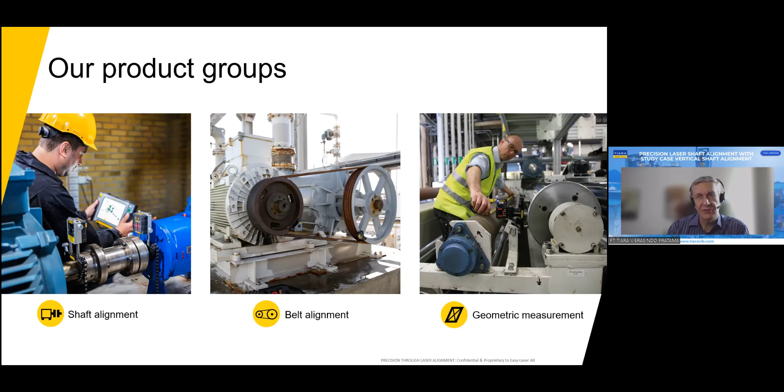So as Easy Laser company, we typically differentiate products into different groups. That is shaft alignment and everything included there, like for example soft foot measurement. Then we have belt alignment, some components, and geometrics. Geometric measurement could mean parallelism, flatness, levelness, bore as already mentioned - everything connected also to squareness and perpendicularity. There are many applications in the machine where we use laser instruments, and consequently the accuracy that comes along with it, to measure certain planes relative to each other in favor of putting machines in the right position where they are supposed to be. A little bit more on this later in the presentation.

We had an exhibition here in Singapore last week, the Asia Pacific Maritime APM exhibition, and many people came and engaged with us because we concentrate on solutions for the maritime market, but we are by far not limited to that.

When we think about industries, for us it doesn't actually matter because we find rotating equipment in all of those industries. You might identify with wind power, energy production plants, or sawmills, for example, where we have a solution to measure the blades of the sawmill compared to the roller that pulls the logs into the machine. Then very typical is processing industry, shipyards as just mentioned, or any kind of manufacturing industry.

So to sum up, wherever you have rotating equipment in an industry where production or operation depends on the availability of these assets, we are typically involved with solutions to provide the technician the means to align the machine.

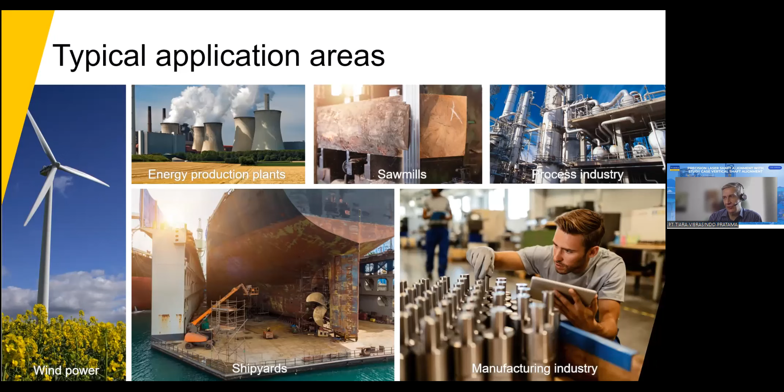But coming a little bit closer to today's topic, I'd like to start with what reliability actually is. I already mentioned the word reliability, and today many people use it very casually, but did you ever think about what reliability really means? Think about us in maintenance, technicians, engineers, and so forth.

Reliability was introduced into the thinking already more than 40 years ago, and it started with reactive maintenance. That's where you have a problem in a machine and you react as a consequence to fix it. You always react to an event on the machine to repair it, to fix it, to replace it. That's old-fashioned and not applicable today anymore.

Many years ago, preventive maintenance came into play. We take statistics to predict how long the machine is operating, or when it could fail, so that the machine would be repaired before it actually fails, to avoid an unplanned shutdown. But it has been learned over the years that this doesn't work out with statistics, for one reason, and I'll show you that in one of the coming slides.

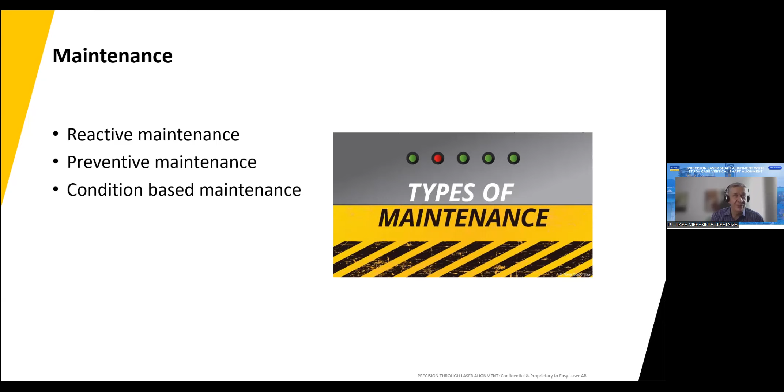People then moved on more into condition-based maintenance. That means making decisions about certain maintenance actions or activity on the machine based on certain parameters of the machine, typically a symptom of noise, temperature, or vibration that says the machine is maybe not well equipped at the moment, and consequently I'd like to bring the machine into better condition. It's kind of a health concept: when I am unwell, I go to a doctor, check it out, and take a countermeasure, medicine, or get a certain treatment. Condition-based maintenance is very similar to that.

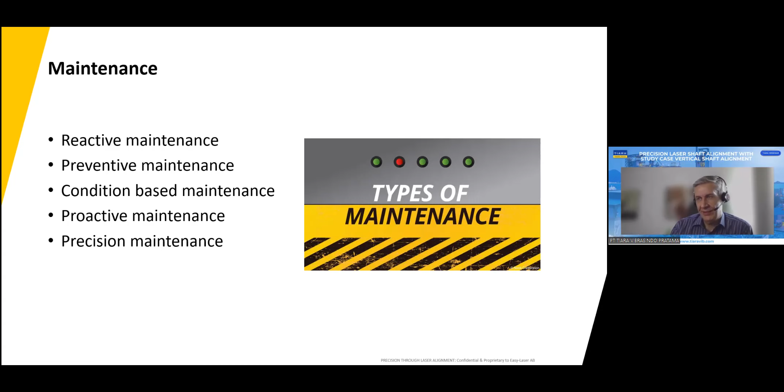Then people went even a step further and said, why wait for a problem to occur and only then react? Why not act proactively? Basically, do everything possible to avoid a potential problem in the machine that would come in the future. Why shouldn't I invest my efforts into an asset to eliminate potential problems for the future? That's called proactive maintenance.

Consequently, in this proactive maintenance, a lot of references are used that describe tolerances for certain conditions, and so we have precision maintenance: doing the job more precisely, setting up the machine within certain tolerances as required by standards like ISO or ANSI, the American standard.

The last stage was to really focus the maintenance strategy on reliability-centered maintenance. That means doing everything possible in combination: applying condition-based maintenance, but also acting proactively and being precise at the machine. Reliability-centered maintenance is the latest approach, which typically has the best outcome overall in saving money. Saving money means reducing downtime, avoiding repairs, and extending the lifetime of an asset so you get the most out of this investment.

But what does reliability really mean? I've summed that up in a very simple sentence: in the machine world, reliability simply means without failure, and preventing failures from occurring — then a machine is reliable. There's actually a longer definition that says a reliable machine would operate without any interruption and without any failure for a certain amount of time. To assure that, certain requirements need to be met: perfect installation and operation, which comes back to being perfectly aligned, perfectly balanced, lubricated, etc. This is something that doesn't start with the asset itself — reliability thinking starts with the people.

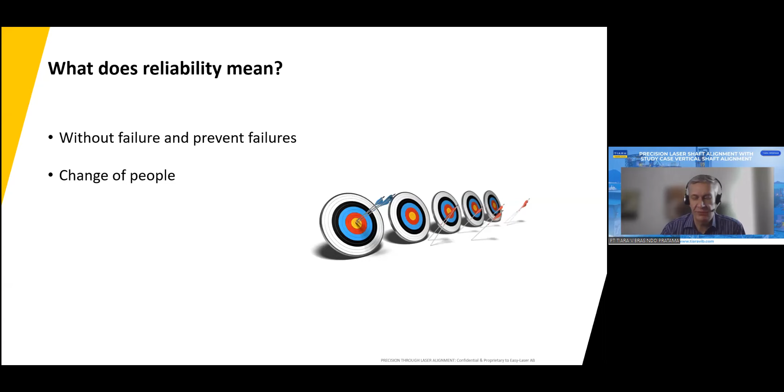So people need to change. People need to adapt to those kinds of requirements, to have a certain strategy to plan actions and fulfill them. Therefore, education is important, and this education helps change the mindset of people to concentrate on preventing the machine from failing instead of repairing it. Maintenance is always needed—you have commissioning, handing over into production, and then maintaining the machine—but we are no longer aiming to repair a machine after it fails. We concentrate on the machine not failing at all, applying maintenance activities before that event occurs. That is a change of people, especially mindset and education.

But it also includes managing resources. Resources are rare today. Reduction of manpower is quite common in industries. Everything becomes automated, but a lot of activities in the maintenance world rely heavily on engineers like you. So we really need to plan to concentrate all the resources given on focusing on the reliability of the machines or assets.

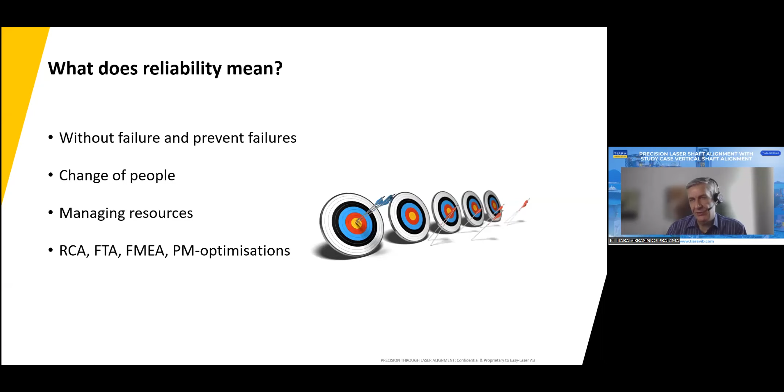And then we have root cause analysis, RCA included. We have the FTA, fault tree analysis—a kind of technology, a statistic applied to calculate a certain prediction of individual assets: when it would be failing, how it is failing, how it can be recognized to have an issue. We have failure mode effects analysis, FMEA, and all of that comes together in certain preventive maintenance optimizations. So that's all bullet words and concentrations in the maintenance world today, typically applied to any kind of plant and operation where you have rotating equipment.

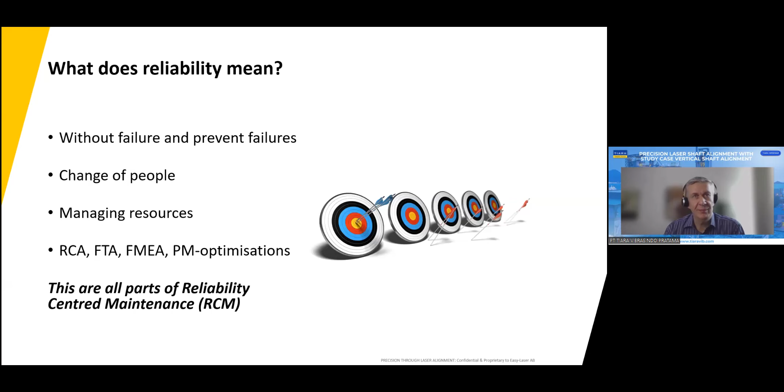All of these are typically parts of reliability-centered maintenance. And that's why we're also including alignment strategies—precision alignment, to be more correct—to help extend the lifetime of the machine and reduce failures.

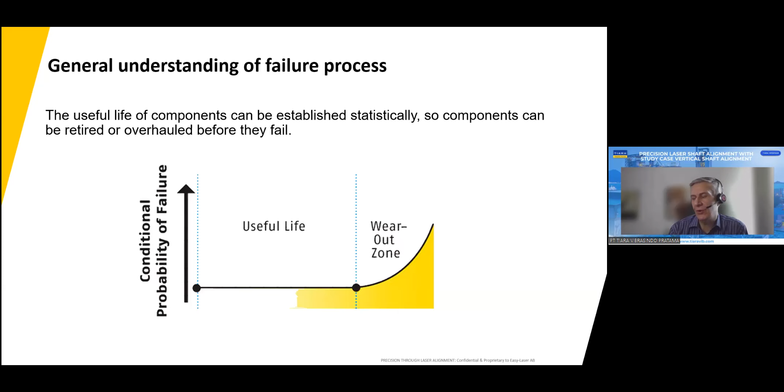But the whole prediction here is actually a little bit wrong, because if you look into some research—this happened in the mid-60s, many years ago—there were studies by two persons, Nowlan and Heap. They are well known in the condition-based monitoring world, and they studied machine failure patterns. They figured out, and it has been confirmed multiple times since the 60s and is still true today, that only 11% of operating machines in the world in our industries fail because of age.

So the previous slide gives us a certain expectation of lifetime and when a machine wears out. But only 11% of machines act in exactly that way. Way more, 89%, create failures during the lifetime. That's an initial break-in period that is potentially random, or the worst and most common scenario, seen at the bottom right, is infant mortality. That means 68% of assets today have a high likelihood to fail at the beginning of their lifetime, not at the end. And the reason is quite simple, but we all ask why it could happen.

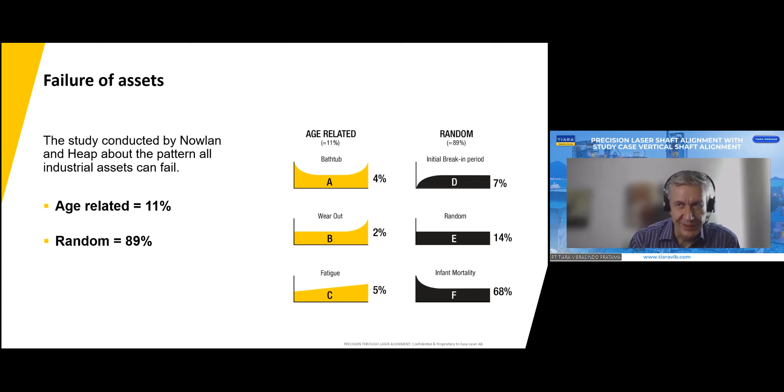It's us, humans, because we are not perfect. A completely different study has revealed that the reason machines fail is also not aging—that's only 4%, something wearing out over time. Basic wear and tear represents 12%. The reason machines fail, mostly contributed—84%—is careless work habits. This means the machine has not been produced correctly by the manufacturer, outside of certain tolerances, or has not been transported correctly from the manufacturer to its end destination.

It potentially has been loaded on a truck, goes over a rough road, gets shocks, bearings are damaged, or on a train. Then it's lifted on site, maybe wrongly by a crane. I have seen in the field somebody put the sling around the shaft of a heavy machine and lift the machine to put it in place. So the whole weight from the machine block is hanging on the bearings connected to the shaft where the crane is mounted. At that point the machine is already very likely pre-damaged purely because of transportation or putting it on site.

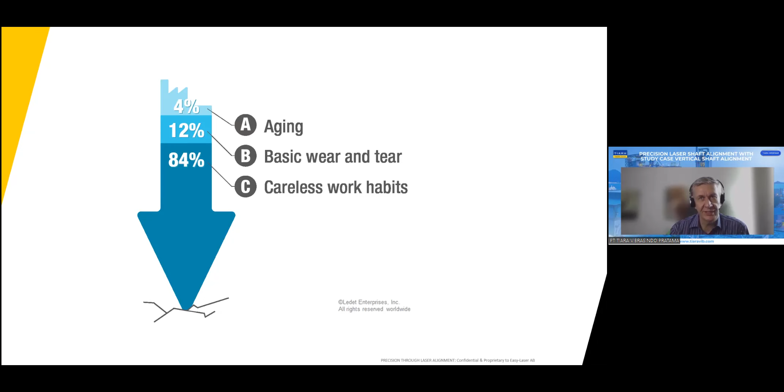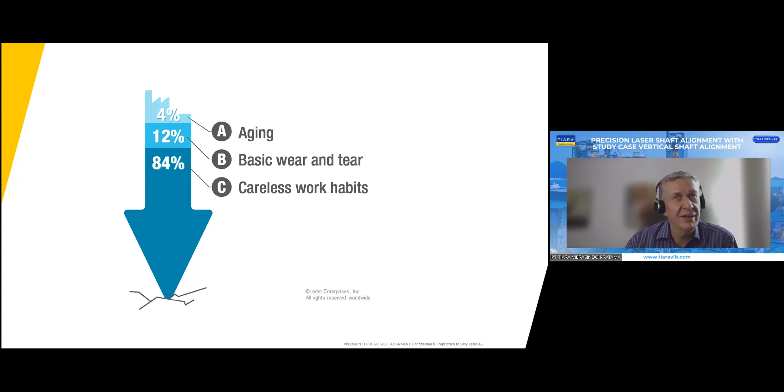That is humans that make mistakes. They treat the machines in the wrong way, or commission the machine, set it up wrong on its place. This includes the foundation of the machine, the base where the machine is standing on not being as required, not flat, not leveled. A machine can have a soft foot because something has bent. Consequently, when the machine is handed over to operation, it starts already with a pre-damage. So all of these reasons are really engineers and technicians contributing to reducing the lifetime as a consequence, and therefore we have random occurring failures.

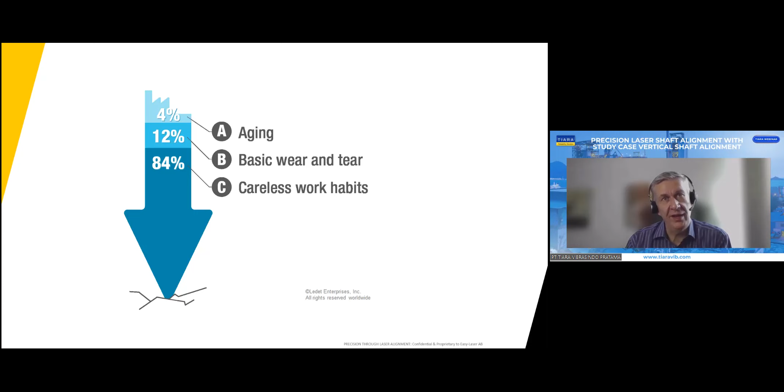With precision laser alignment, you have some tools—there are many others, not only laser alignment—that help you put the machine in place in the right way, to certain required tolerances, everything with the aim to have a reliable operation in the future.

And that's where we have this kind of potential failure curve. Also in the vibration world, this information is quite common to be shown. Vibration world means reliability, thinking about maintenance strategies, that a machine that has a problem, like a human being, creates symptoms. So if I'm having a headache, feeling unwell, my problem is not the headache. The headache is a symptom. It's caused by something else.

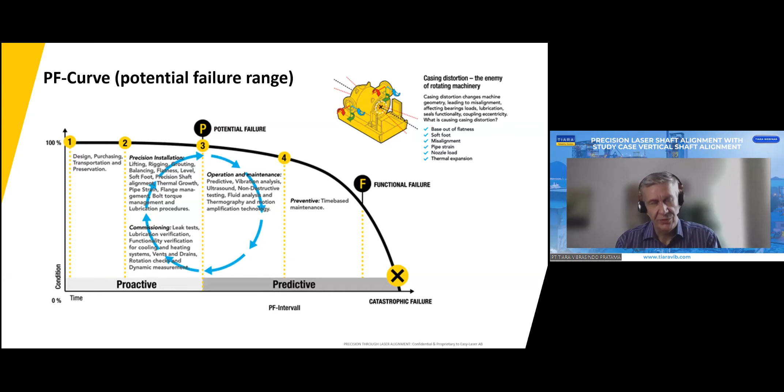Consequently, we have electronics and all kinds of data analyzers and technologies today to assess machine conditions and recognize symptoms, but I still have to do a root cause analysis to figure out what actually causes this symptom. Because if we never fix the initial problem the machine has today, we will find ourselves in one or two years again at the same point.

You can see the symptoms develop between the P and the F, inside that range marked starting at point number 3, which is the potential failure, towards the functional failure when really something is breaking down. That is where electronics and instruments today are able to catch the symptoms—vibration, ultrasound, or thermography—in that range you basically measure a symptom.

As you can see, between point number 2 and 3 is where we recommend end users and technicians apply precision shaft alignment, because shaft alignment helps extend the lifetime and avoid catastrophic failure. So instead of waiting for a problem to occur, why not be proactive and do everything possible at the beginning of the machine's lifetime to have a machine that has no stress, no pressure points on the bearing, no misalignment.

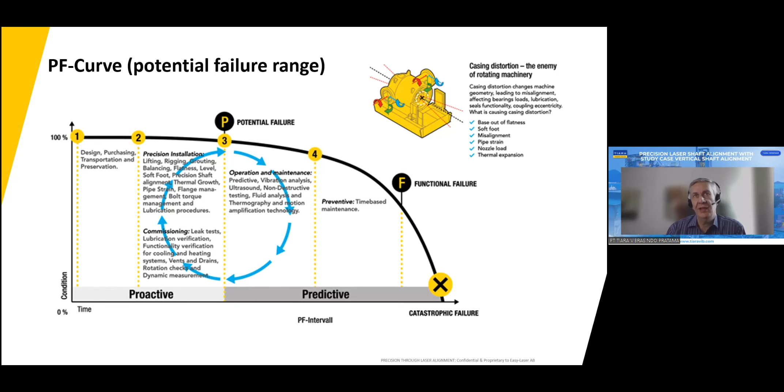This includes rigging of the machine, grouting, balancing, measuring, and verifying the flatness of the base, the level, checking and eliminating soft foot, and then it comes to the precision shaft alignment. So there are so many things that can be and should be checked today, and we only need the technology and the mindset, the education to do that. It's proven that precision laser shaft alignment contributes to the reliable condition of the machine and extends lifetime.

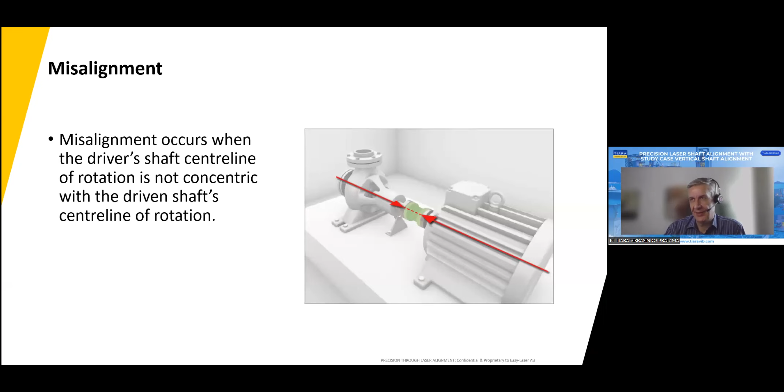What is machine alignment? We talk quite often about alignment of machines, and I'm sure you have an idea. The basic idea is shaft alignment, but not only alignment. When we think about misalignment, we talk about the shafts. Misalignment occurs when the driven shaft center line of a rotating asset is not concentric with the driver's center line. We are not aligning the coupling, we are aligning the machines physically to each other so that the rotating shafts are in center.

We will later learn that we mount our laser measurement components on the shaft to assess exactly this information. The correction of the machine, then, is done on the feet, where we can really countermeasure by doing some shimming.

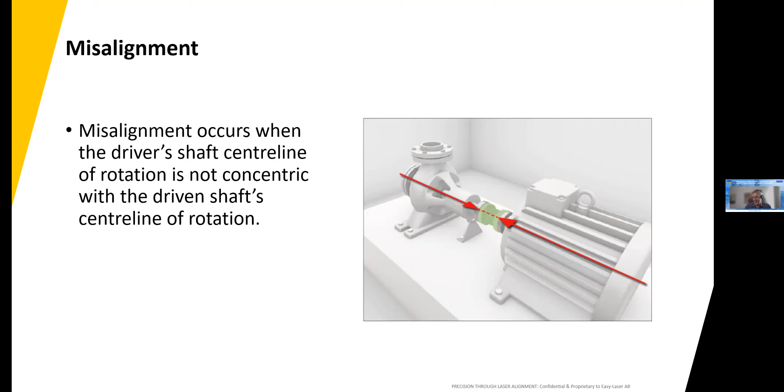If you think what kind of misalignment could exist, that is parallel misalignment and angular misalignment, and there are various ways this kind of misalignment is caused.

An inaccurate assembly of components could be the key for the coupling, the coupling itself, the bearing, or the machine on its base. There are a lot of parts responsible for inaccurate assembly of components. Even a connecting pipe to a pump can be inaccurately assembled and cause misalignment.

The relative position of components shifting after assembly, so something has changed compared to the initial setup. We can have a distortion by dynamic forces. Dynamic could mean in a pipeline where you have a different medium with a different temperature pumping inside and outside of the equipment. So certain things, because of temperature, start to extend and push the machine into a wrong position. Consequently, it becomes misaligned.

This is often summed up as thermal growth, but it's better to say dynamic influences, because the distortion can come from the growth through temperature of the machine itself, but also by the pipe, by the medium inside of the pipe, or other components.

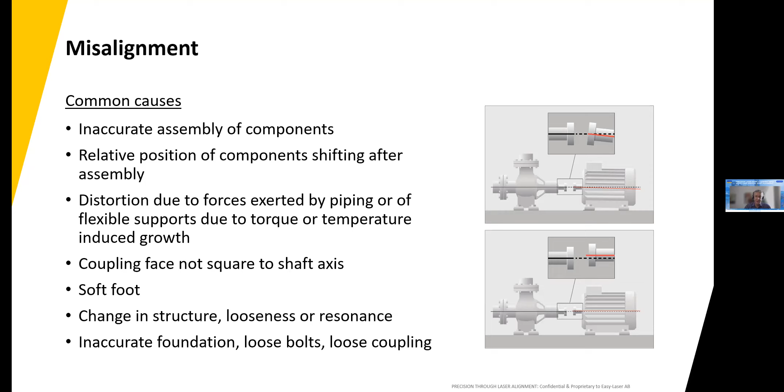So there are many reasons why a machine could be misaligned. Inaccurate foundation, loose bolts, loose couplings are just a few more.

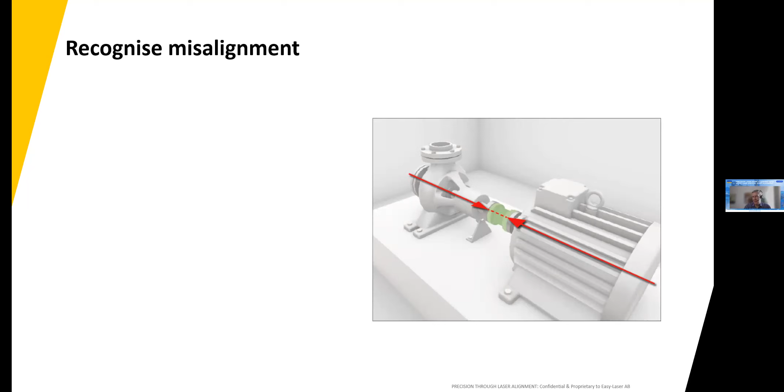How do we recognize misalignment? So also here, a little bit about vibration, but very simple: earlier seal and bearing failure.

When the bearing, which by design is actually created to operate infinitely, so the bearing by itself does not become faulty if it's lubricated correctly, a bearing would last forever. But throughout load conditions, start, stop, and misalignment, the bearing starts to fail. So earlier seal and bearing failure is a symptom that the machine is potentially not correctly aligned.

Excessive heat is also related to stress inside the bearing throughout the rotating shaft. If something is misaligned, then typically we have a temperature that is increasing. The machine operates with less performance, meaning it could take more energy to drive a certain driver or just have a higher play. These are typical symptoms for misalignment. Another symptom is vibration and noise.

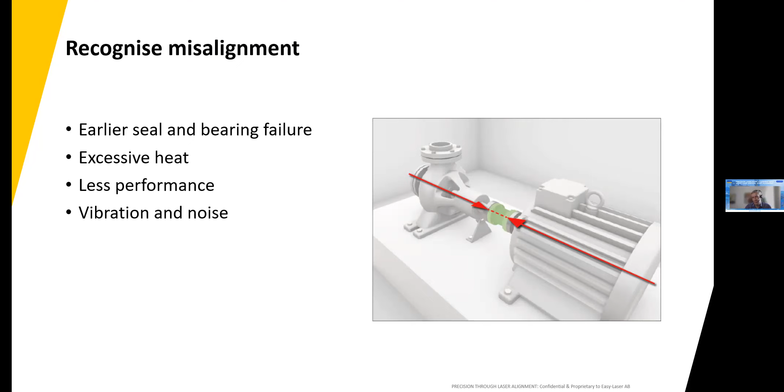Already explained that a vibration is a symptom of an origin problem, a root cause. Higher power consumption, typically - if I have strain or pressure in my bearings because of misalignment, I require more energy to drive those shafts to the nominal speed I want. Consequently, if there's resistance inside, I require more power. On the other hand, if my machine is perfectly aligned, I can save power consumption - I save money, up to 10% in many cases.

So alignment check would be the ultimate way of recognizing misalignment. But of course, I need to access the machine when it's not operating. It's very quickly done to put the brackets and measurement technology on a non-operating shaft and just measure and check the condition. But it is required that the machine is not operating. The alignment check is the best one, but there are many others inside the operation of the machine that I can take to recognize misalignment.

What kind of parameters should I compare my condition of the alignment to? We have tolerances. Here we see a table of the ANSI, American National Standards Institute, which today is worldwide used to describe the minimum accuracy level that the shafts need to be aligned to. We have here typically an association from a certain tolerance to the speed of the machine, and I have underlined two in red: one's 1,000 to 2,000 and second 2,000 to 3,000 RPM. An excellent alignment, so no harm to the machine, has an allowable offset of only 0.03 millimeter.

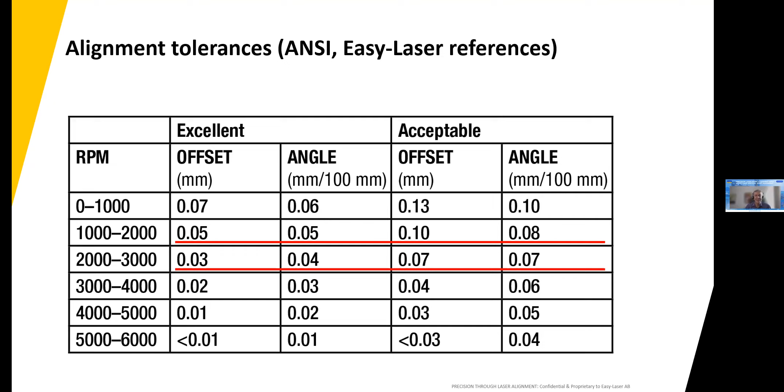So 3 hundredths of a millimeter is my offset. The angle misalignment is 0.04 millimeter. Acceptable is about double this amount - that's in between good and bad. The bad one I did not even mention, so everything that is neither excellent nor acceptable is not permissible. That means the machine is misaligned and harms components in the machine when it is operating. So those references are inbuilt - you can activate them on a laser alignment system and just compare the condition of the machine to those references. Are you actually inside those tolerances?

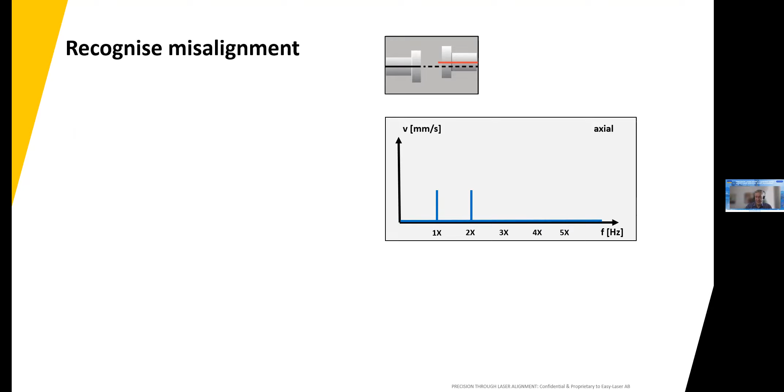Another way, coming back very quickly to vibration, to recognize misalignment - many businesses today use some data analyzer vibration equipment. They are also using an FFT, and quite often you should be able to recognize, based on the pattern given - not necessarily the absolute vibration value - that there's a first order and second order appearing. 1x and 2x are the orders of the running speed of the machine. So a machine that runs at 1500 RPM, first order is equivalent to 25 Hertz. 2x is the double, 3x the triple - very simple, but it refers to the speed of the machine. If you have some energy, some peaks in an FFT in the vibration world, we can assume there's a misalignment.

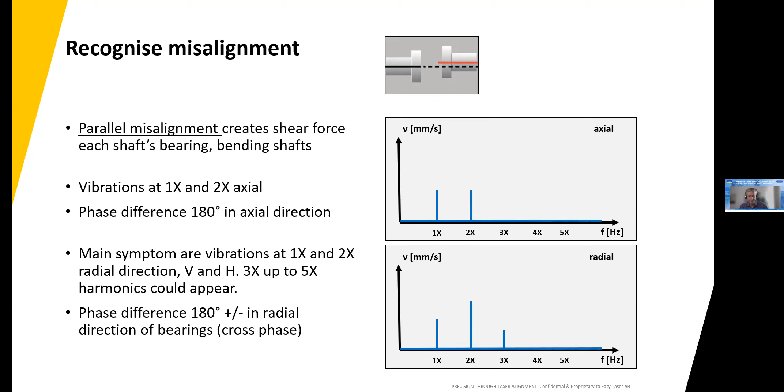So misalignment - we have here a differentiation between parallel and angular misalignment. Now, this material which we are showing you in this presentation, PT Tiara can share with you. Please reach out to Mr. Rojecki and the team - they can provide you all of this information in a kind of PDF format. The experts that you have in your company in the vibration world can also deal with these kinds of matters. I'm just taking them here in the presentation.

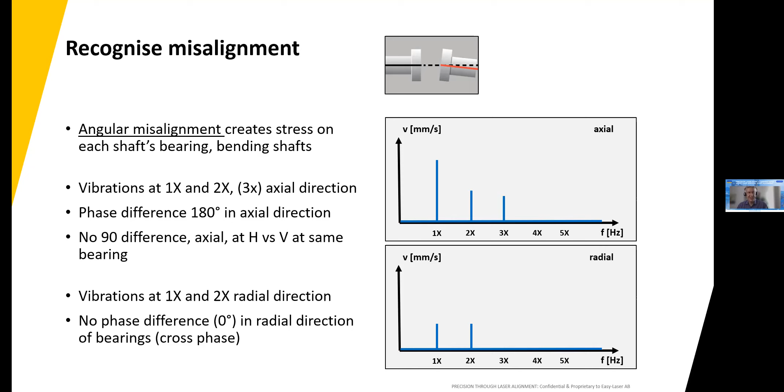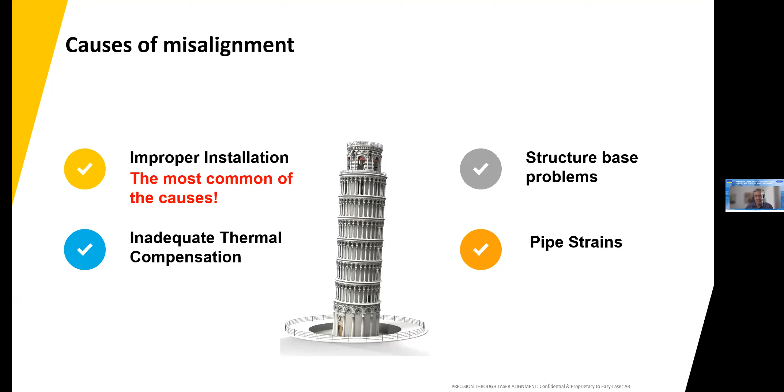I don't really expect you to answer this right now, but think about which is the number one out of those four - the highest contributor to the causes of misalignment. Is it improper installation, thermal growth, structure-based problems, or pipe strain? The most common of all four is actually improper installation. This goes back again to the engineers that just didn't put the machine correctly in place, not correctly into the references and tolerances we have. Machines are put in place misaligned, unfortunately. But with education and with activity, we can do better.

But altogether, we have increased vibrations. Nobody really wants that. We have seal leakage, so it looks messy, oil comes out, lubrication grease comes out, needs to be greased in a smaller cycle. It's a typical symptom of misalignment. Bearing wear, so the bearings are wearing out very quickly.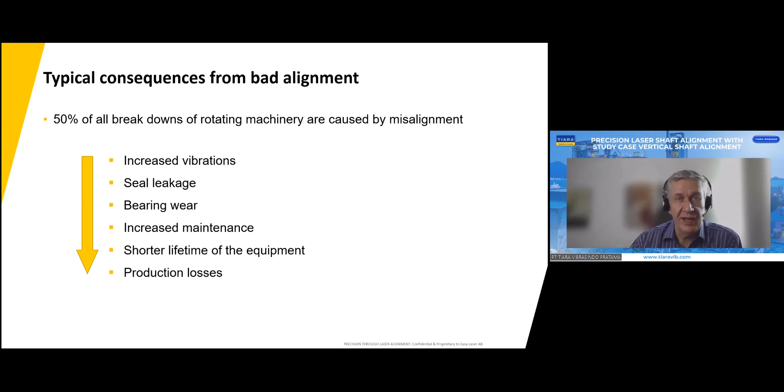We have more activities in regards of the maintenance to maintain the machine, repair the machine. We have shortened the lifetime of the equipment, so the lifetime is not reached and the equipment is failing, needs to be replaced. All of these are symptoms or consequences of misalignment.

And yes, production losses, because if a machine is not available, it is not available to us, meaning not reliable. I have an unplanned shutdown. Shutdown means I have a loss of production. That's the highest cost that I could, in a negative way, have here.

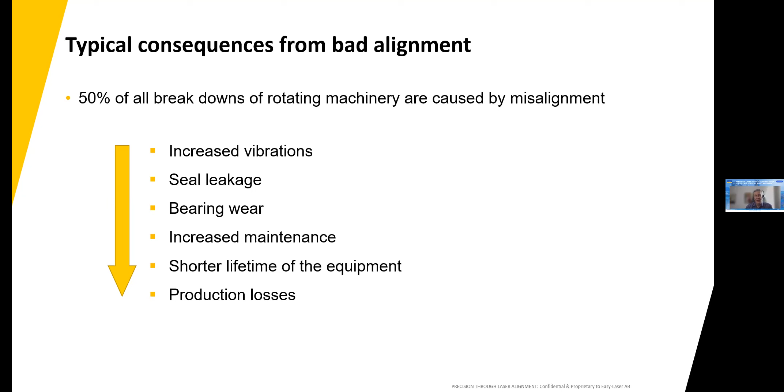And you also measure actually on the coupling, you're not measuring on the shaft. So you're putting the straight edge on the surface, on the flange edges of the coupling. That's not what we're really interested in, because we measure the surface on the coupling, but what we really want to know is the shaft. So it's very, very subjective. It's not accurate and doesn't really help us much.

Consequently, 40 and 50 years ago, dial gauges came into play. So there are two methods, the rim and face method and the reverse method, using two dial gauges rotated on the shaft to assess how much play the shaft actually has in comparison to the other. So the displacement here is then measured by rotating the shaft.

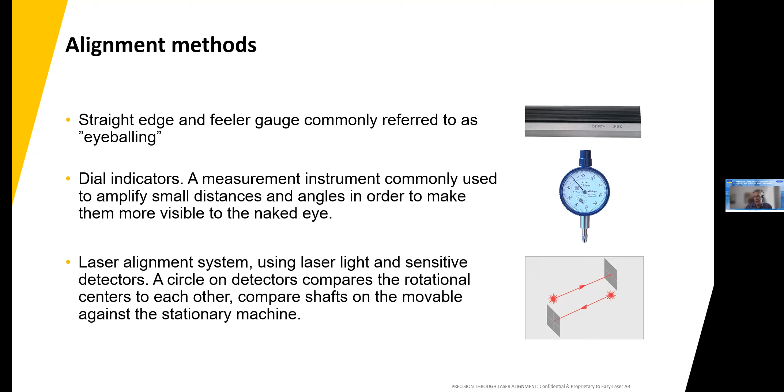As already said, shaft alignment is just one part of many concerns for us. When we think about the installation of the machine, we start with the flatness. The flatness of the base where the machine is standing has to fulfill certain requirements - it's a geometric condition where the surface has no or little variation in that one plane.

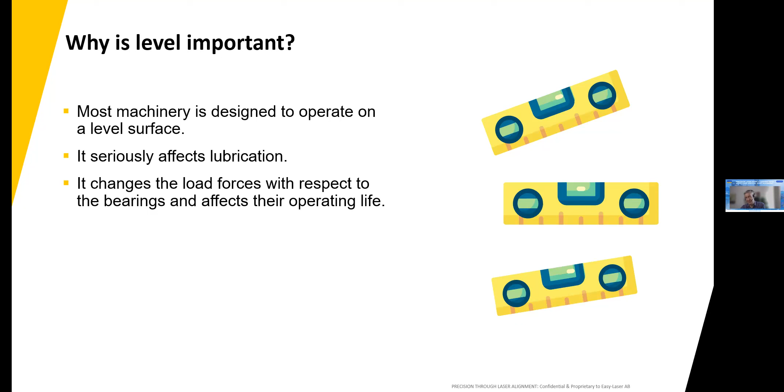Also, the level is important. Most machines are designed to operate on a level surface. If it's not level - meaning square to gravity - the lubrication of the machine won't work perfectly, and the load on the drive end and non-drive end bearings could change. So there are serious effects caused in the machine if the base is not leveled. The design of machines assumes they're standing on a leveled and flat surface.

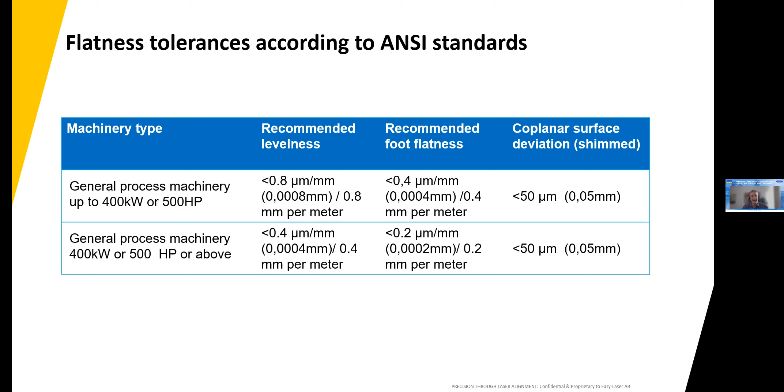All of these things can easily be measured with a laser. You have a unit that emits a laser and another unit that receives it. When you compare them to each other and move them around on the foundation, you can simply check: is it flat and is it leveled?

Soft foot, already mentioned earlier, is often overlooked. Here we have a typical picture - there is a gap between the foot of the machine's surface and the base. Of course, when we bolt it down, what happens?

The machine is rigid, but the whole body of the machine gets strain put into it. And this strain is transferred into the bearing, from the bearing into the rotating shaft. And if I'm forcing my shaft to rotate under strain, my bearings start to fail over time.

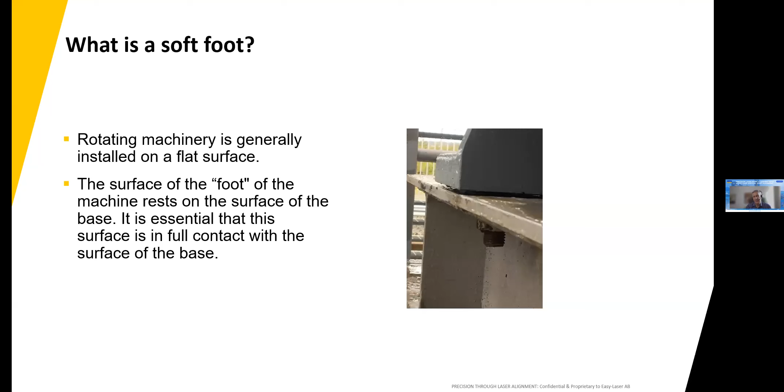The soft foot needs to be corrected. It can easily be measured with a laser alignment system. It is really essential that we correct soft foot. The rule of thumb says that everything above 0.05 millimeter - the gap measured when we loosen the bolt - needs to be corrected by shimming.

Otherwise, we have modification of the housing geometry, stress induced into the casing, modified bearing loads, lubrication, and position of the seals - all of this gets influenced purely by a simple soft foot. This is not rocket science to correct, but we need to learn it, and be aware of how important it is to correct a soft foot.

And also, when somebody tries to do a shaft alignment on a machine that has a soft foot, you will not succeed. That's why those who align machines correct the soft foot first.

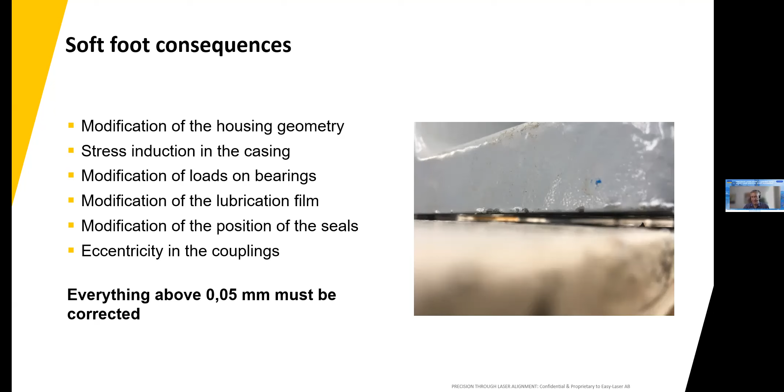Last in this topic are those dynamic forces. Thermal growth is one potential cause. The motor in this example changes its material density from non-operating to operating state because the temperature is increasing. With increased temperature, the material extends. Consequently, the motor changes its position compared to the pump, which maybe even is a cooling water pump.

So therefore, we need to understand these dynamic forces, because it's called alignment - we need to compensate for that kind of thermal growth, so that when the machine is in operating condition, including the thermal growth, the machine is perfectly aligned. The instrument can handle that for you, but you need to know and measure those kinds of dynamic stresses to compensate for that growth.

Another strain could be connected pipes. This is a picture from a real case that my colleague in Sweden had. He did some service in Spain where they installed a new gearbox on a pump. Everything needed to be moved away, they fixed the foundation, put a new machine on it, and the flange pipe didn't fit anymore. So very commonly what people do is force it together, using tools to force the bolts into the holes to match them.

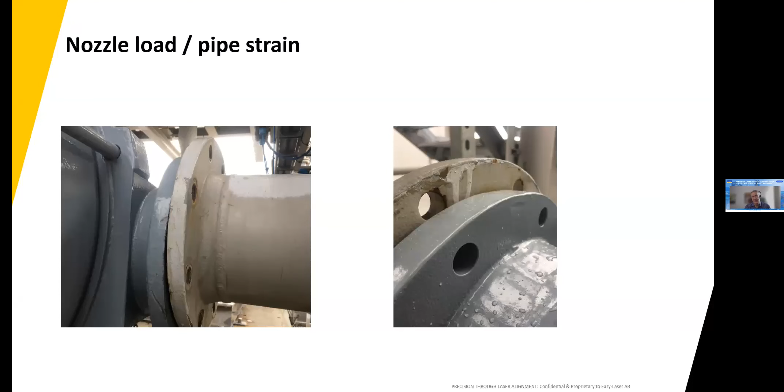So instead of forcing those two pipe flanges together, the machine or the pipe itself needs to be corrected. It needs to be aligned so that they fit without any force, perfectly together. Only then do you have a reliable machine installation. So that's all related to thermal expansion and dynamic stresses.

Those things can be measured also purely with a laser. So instead of mounting the brackets on the shafts, we just mount them on the machine relative to another machine, to compare the position to each other as a monitoring or recording device. We operate from the machine cold to hot and see how much the machine is changing in vertical and horizontal axis at the same time. Once we've established that data, we can use this growth or dynamic stress, apply it to the alignment targets, and compensate for them. That means we align the machine always in perspective of the operating and hot operating state.

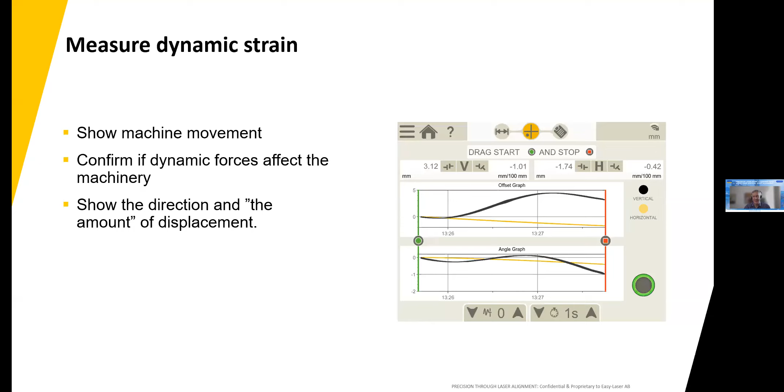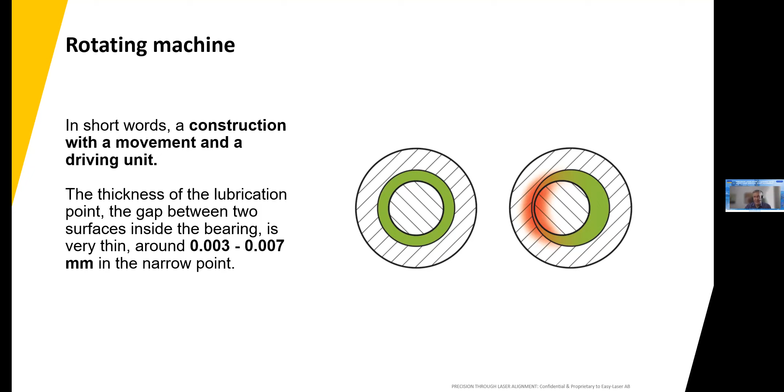So a rotating machine is a construction with a movement and a driving unit, and the shafts to each other should be aligned in vertical and horizontal axis within a range of 0.045 millimeter - we have seen that earlier. And here we have the information about the play of the bearing. A bearing has a play in the range of 0.003 to 0.007 millimeter. You can imagine what a certain misalignment does to this play of the bearing - it creates stresses and hampers and damages the bearing.

A perfectly aligned machine can reduce resistance inside the machine. Consequently I require less energy to drive the shafts. So they really have the ability to reduce energy - you save energy through precision shaft alignment, in many cases 10% and more. And that can be a lot if you have various machines in your assets, in your environment.

Cost savings - there are a lot of things for us to consider why precision alignment is good besides reliability and lifetime. We have 10% power consumption as a potential, a reduction typically associated with the bearing, with the seals, with the maintenance of the machine, and we increase the lifetime. So there are really benefits where you save money through a reliable installation and reliable alignment of the machine - precision alignment, to be more correct.

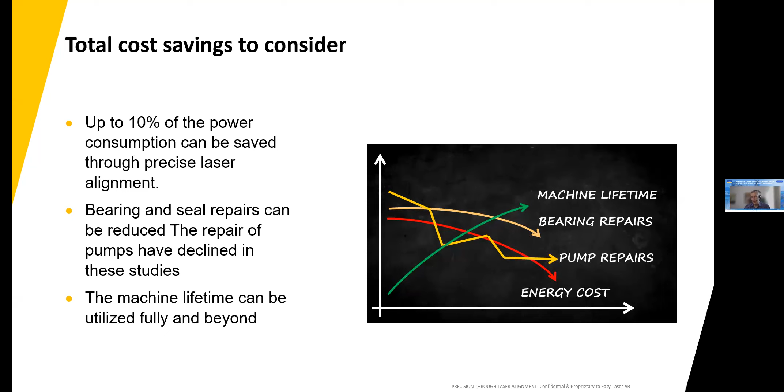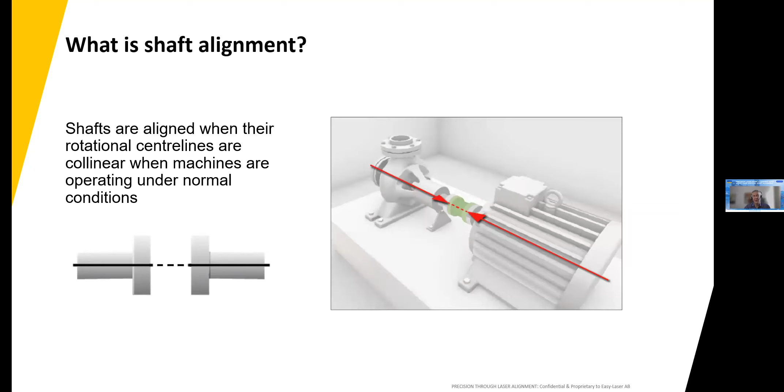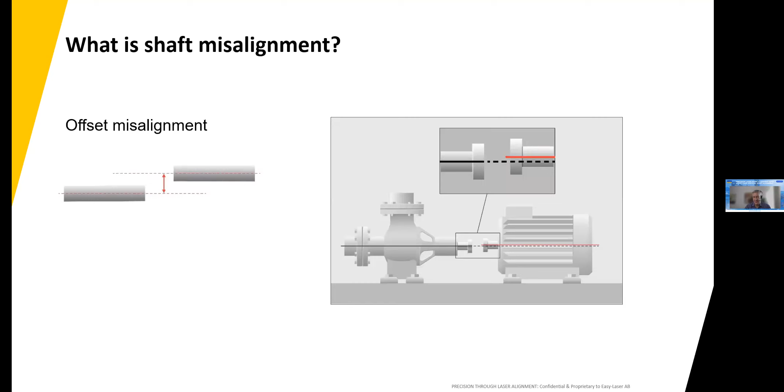Just to recap, what is shaft alignment? Shafts are aligned when their rotational center lines are collinear to each other under normal operating conditions. They would be misaligned if we have either an offset - we see here parallel misalignment, also called offset misalignment - or angular misalignment. Angular is actually the more harmful one for the machine.

But in practice, most machines have both in combination, parallel and angular misalignment. That means I need to identify that and do the correction on the drive side and non-drive side of the feet of the machine, moving them in slightly different amounts to also correct angular misalignment.

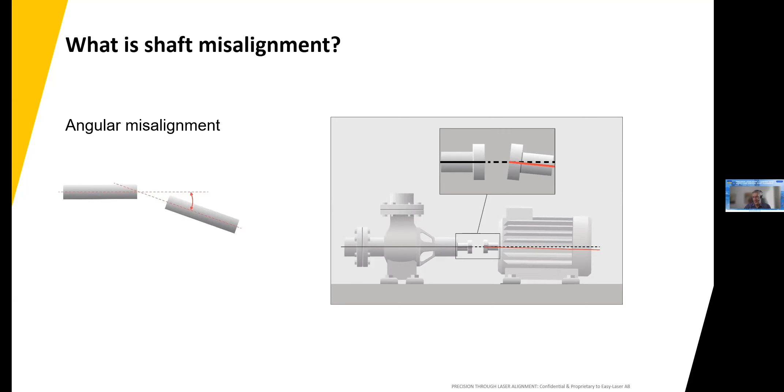Benefits of precision machine shaft alignment, or alignment in general: increased lifetime from the operation of the machine, reducing costs for spare parts, bearings, seals, reducing maintenance labor. You focus your maintenance resources on maintaining the machine, not repairing it. You reduce costs on brackets, on documentation issues - that's in comparison to the dial gauge. You have improved planned operation and reliable operation as a consequence. The machines, the assets, are more available to you for your processes in your plans. You can reduce the power consumption very easily.

Consequently, and it's in all of our interest, you would improve the plant safety, which is in all of our favor. And you can contribute with all of those topics to a more clean environment by reducing spare parts, reducing energy consumption, and so on. There are a lot of benefits.

And to achieve all of that, to sum up, we can do something, and we should, in regards of the foundation's flatness and levelness. Then we have the dynamic stresses, which is pipe strain and thermal growth. And on the machine itself, we have the deals of soft foot and of course the shaft alignment. All of this is something an ordinary laser alignment system can measure, and of course it needs to be corrected. So the best tool is not doing the correction for you. Engineers and technician maintenance personnel have the tools on hand to assess the conditions of the machine and correct it also. That is still an engineering discipline.

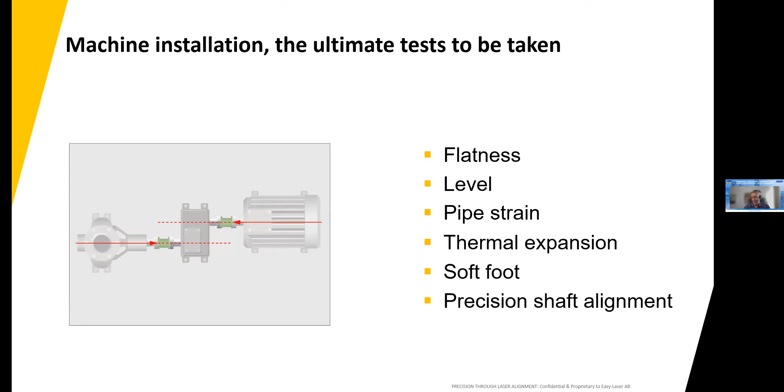Now, let's talk about vertically oriented machines. It's quite common to have them, and in a way, I must say, kind of a little bit ordinary - ordinary when I'm thinking about, say, maritime, where we think about rudder alignment, stern tube alignment, compressors, gearboxes, and things like that. But there are many pumps and other machines that are oriented in a vertical position.

Here's a small case. The case is a couple of years old, actually done by an engineer with an instrument of an older generation of Easy-Laser D-Series. This is a Sundstrand vertical pump application in Sweden. They wanted to install the pump and align it to the flange without having the motor on the whole framework. So the challenge was how to align that even without a machine.

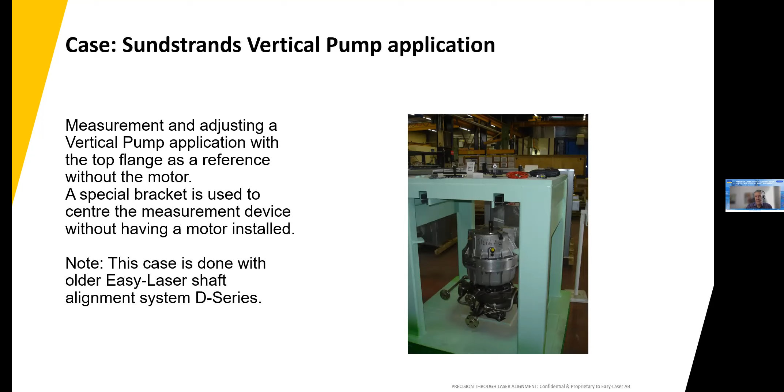So you have the pump at the bottom, and at the top where the motor needs to be mounted, we're just dealing with the flange. We found a way with a customized bracket to do that. So just let me go through these 2-3 slides.

What the engineer figured out is we're using a 3-armed bracket. This is basically our representation of the motor that does not exist yet, and we're putting it at the top of the frame structure where the motor would actually be sitting. We set up from the first and second arm where we measure the diameter of the flange of the theoretical motor and copy that radius towards arms number 2 and 3.

Then we put the bracket on, using the third arm, which is spring-loaded, to clamp it inside of the flange from the frame structure. This makes sure the whole center part is really in the final center position where the motor's shaft would be. So you see in the center of the circle there's a point, or bolt, sticking out, which represents at the end the shaft of the motor that we do not have yet.

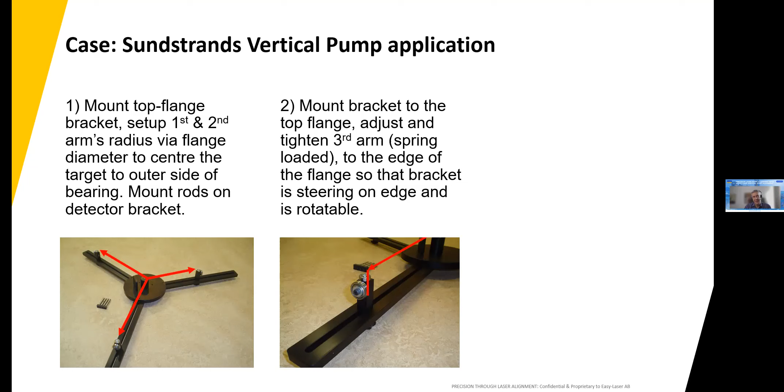So the challenge is basically to put this whole adapter, the three-legged mounting part, in position to be centered. We see here on point number 2, on the right hand side, the mounting measurement of the top of the frame where the motor would have been sitting, and beneath is actually the bracket with that little bolt that represents our shaft at the end.

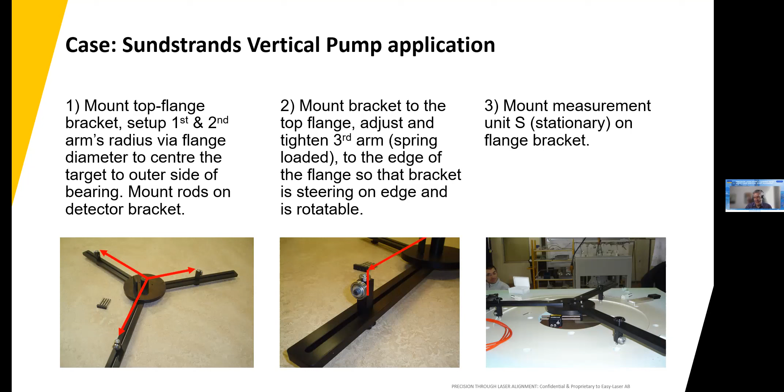So the bracket is then mounted, rotated, tested, and the measurement unit is placed on. Then I'm targeting both measurement units to each other. I put one unit at the bottom on the machine, pointing upwards around the shaft from the pump, and the top one represents the circle-mounted detector or measurement unit of the flange bracket, which is the representation of the motor shaft. Then I turn on my instrument, and I will do that in another test here live for you just to see how it looks like.

I have an X and Y, and I can target my laser perfectly into the center of the detector - that's my fine adjustment. Then I'm just rotating into 3 final positions, something like 9, 12, and 3 o'clock, measuring in those 3 positions relative to each other, with 90 degrees in between, to assess the 3-dimensional condition of the measurement units, which represent the shafts of both machines. Then I get the condition of how those 2 machines or shafts relate to each other, and I can do my correction.

So here in point number 5, we see those 3 indicated arrows in red. That's my decision points that I declare as 9 o'clock, 12 o'clock, and 3 o'clock. We do that with clock positions because the measurement units would be able to measure the angular position in a horizontal shaft alignment. Whenever you use those measurement units for horizontal machines and rotate, the measurement unit knows exactly, with a 1/10 of a degree accuracy, the angle. Like 12 o'clock is 0 degrees, 90 degrees, etc.

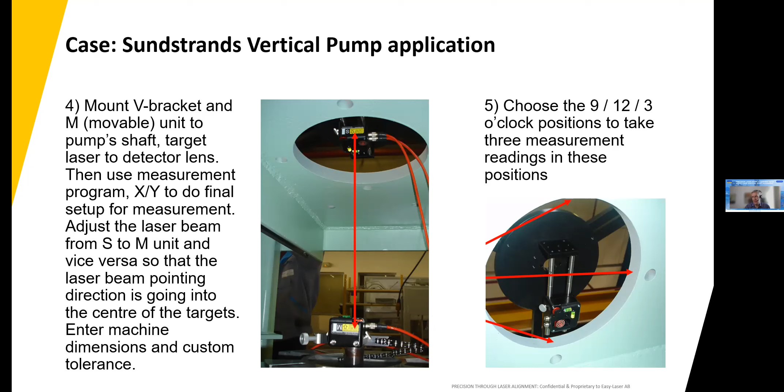Consequently, we as engineers define our fixed points. They just need to be oriented potentially at the flange bolts, or need to be 90 degrees apart from each other. That is good enough. And maybe you make some markings on the objects to rotate the measurement units into those 3 positions, take a measurement, and then the algorithm of the measurement system calculates everything relative to each other.

So we have here basically the principle of clock position, but in a vertical orientation, like 12 o'clock, 3, 6, and 9 o'clock. They can, but don't have to, be the flange bore. So you can have more bore holes for that, more correction points.

When you're doing the vertical alignment correction, you're typically using shimming around the bore holes where the motor or the pump is mounted. There you change the angle in vertical and in horizontal, or in two different axes relative to each other.

Since 3 measurement points at 90 degrees is actually sufficient for the mathematics to work, we also do not require to measure more. If you've done laser alignment in horizontal, I often recommend the end user measure maybe 4 or 5 readings. That can be a little better regarding play and backlash on the coupling, effects like that, to take a couple more readings because they're done very quickly. But since we measure vertically here without the coupling, I don't have that play, so I can stick to the minimum requirement.

It means I can, or should, measure only 3 points. Those 3 points need to be 90 degrees apart from each other, and that's good enough. So when we have the result, have all of the data, the algorithm, the mathematics in the system then tells us about those two axes: one is the axis 9 to 3, and the second the axis 6 to 12, like a cross, where we are shimming the machine. So we're changing the angularity of one machine to align it with the other machine.

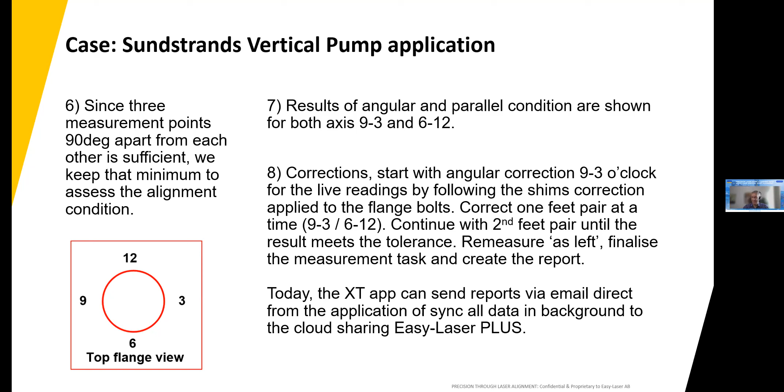So the XT that I'm using is the 770 -- that's just the name of the whole system. And it looks like this: we have some brackets, chain brackets, V brackets, magnet brackets. We have the two measurement units, and we have a display.

So the display is app-based. You can run it on your phone, on your tablet, Android or iOS-based, or on our provided industrial grade display unit. But that's just the interface where we see everything and key in information. Everything is live streamed through a Bluetooth connection between the display unit and the measurement unit. And as I just said, it's one app for all kinds of applications that we support with the XT family. So you can, together with also PT Tiara, explore what other features we have. Vertical, like the one I'm showing you very soon, is just one of many applications you can cover.

This is just the kind of results that you would see on the screen. I have them here on camera, maybe not the best quality. So being proactive, I copied from test measurements a couple of things just for us to see how it looks like. So we have a main menu.

We choose on this main menu shaft alignment and vertical. We're coming to a screen that requires some dimensions. To measure the condition of the machine in regards to alignment, the dimensions are not needed, but to do the calculation for the correction, so how much shimming I need to do to align the machine, then I need to understand the dimensions of the machine, meaning the measurement computer needs to understand. So we need to key in the dimensions from the position of the measurement unit.

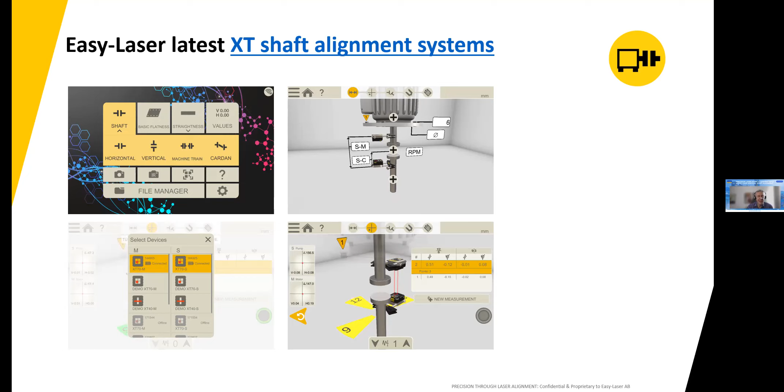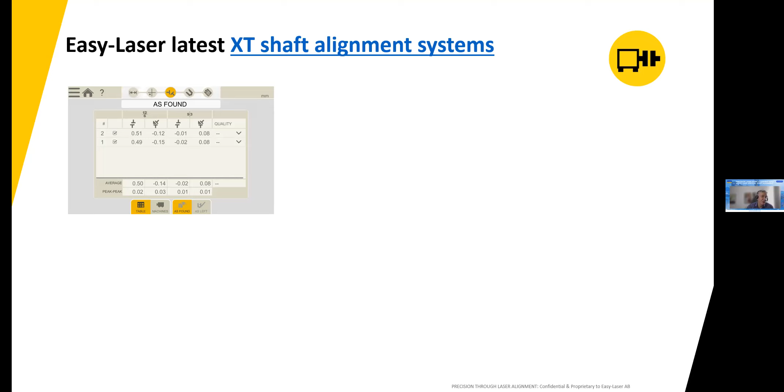You come to the results, so I can mix my 2 results. You can pick one of them if you like one more than the other, maybe more accurate. But you can calculate the average of the 2 sequences of readings.

You get your live screen of the measurement result. The color indicates red outside of tolerance. The yellow color indicates acceptable, and green means inside of excellent alignment condition, according to the tolerance that you have activated.

You do the correction live on the machine. I will show you that very briefly, and then you create your report. You finalize the measurement reading, getting the protocol inside of the instrument. You can send it out via email, or you can just put it into cloud sharing. So that's basically part of the report with all of the data that you once have measured, the dimensions that you have keyed in, and everything that you have found the machine with and also left after you correct. So you have good evidence of your work and how you have left the machine and in what kind of condition.

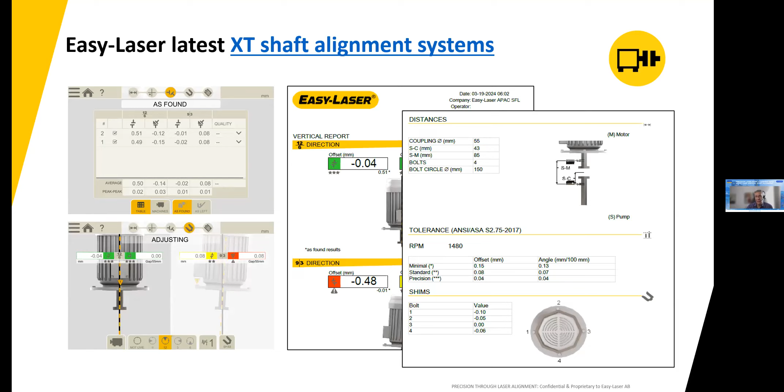Mr. Rojecki, are you still there? Oh yeah, Sven, thank you. We have so many good questions here. I ran a little bit far from the time. I think I have taken too much time. Okay, do we discuss it now or later on?

Maybe give me 2-3 minutes to show that very quickly. Okay, no problem. So you should see right now the camera picture on the rig that I'm having here in front of me. I'm turning on my measurement units.

So the rig that I'm using is just vertical, no coupling. The coupling is turned, so they're taken off. I'm using here brackets that are connected with magnets, so I can turn them, of course, independent from each other. I'm starting with one certain position of the measurement units.

I'm saying, well, I'm taking actually a template. I created a template, just give me a second. That includes already the measurements for the dimensions of the machine. That makes it a little bit quicker. So you cannot potentially read that, but...

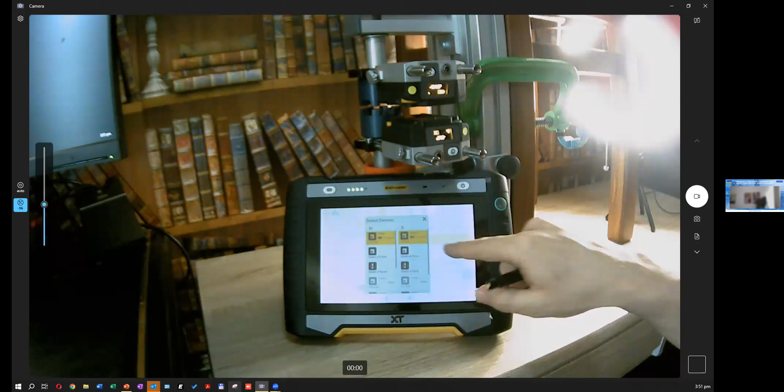I'm going into the next step where I'm making the communication. One of them is actually off, so they are both connected. I have here multiple hardware that I can connect to. We have now those two measurement units. They are already connected, just that one of them is off. Where is the other one?

Oh yeah, of course. The lower part, I have closed the lid. I need to open that so the laser goes really into the lens. Do you see on the left-hand side that my laser dot is hitting the target?

We're having here a dual measurement principle, and I'm just rotating the two shafts independent from each other. Left, right is not so important right now. We like to measure the angle, and in favor of time, I'm doing that very quickly.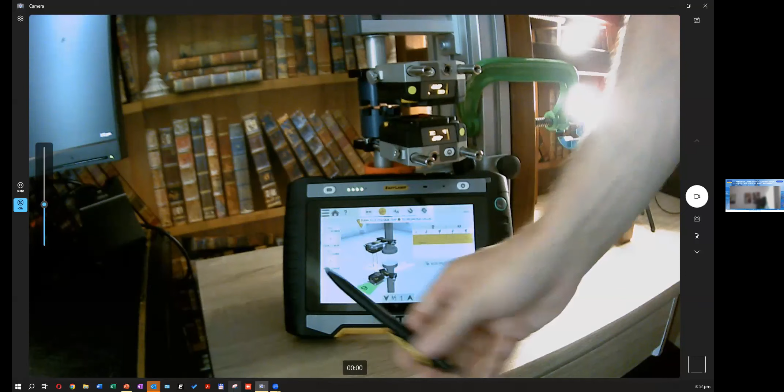I can make an electronic zero, but I keep it as it is for the moment. That's where I like to start, in my 9 o'clock position. So I take a reading, number 1. Now I rotate as advised into the second position.

Roughly in the center, I take my second reading, at the 3 o'clock position. Reading number 3. Now I already have my result.

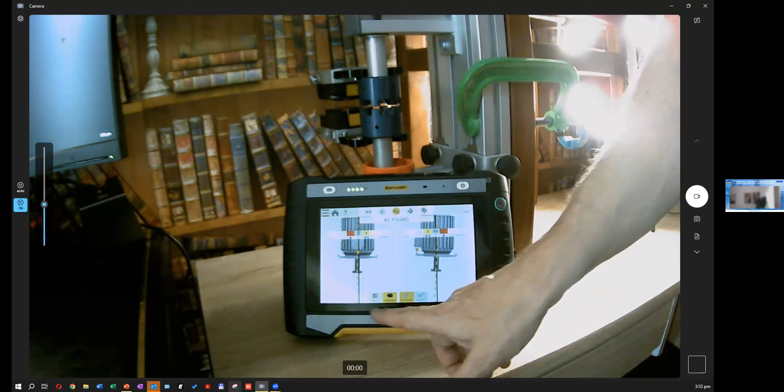As I said, I would typically measure one more time and mix it, but let's just take this one result. I'm having here a measurement table where my misalignment result is listed. If I go to the machine view in 3-dimensional, you can see that we're actually having red on both axes. One is in vertical, the other horizontal orientation — one is the 9 to 3 and the other is the 6 to 12 o'clock axis.

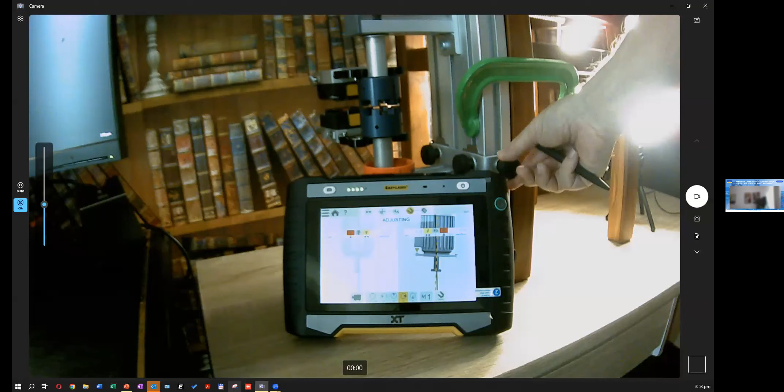Going into the correction mode quickly, I decide where I'd like to start — this is now my 9 to 3 axis, and I stop at point number 3. I click on the bottom menu and start my live correction. Everything I change now in the condition would transmit live, and you're shimming as the instrument tells you, but you can also see the live reaction. You can already see that the color has changed.

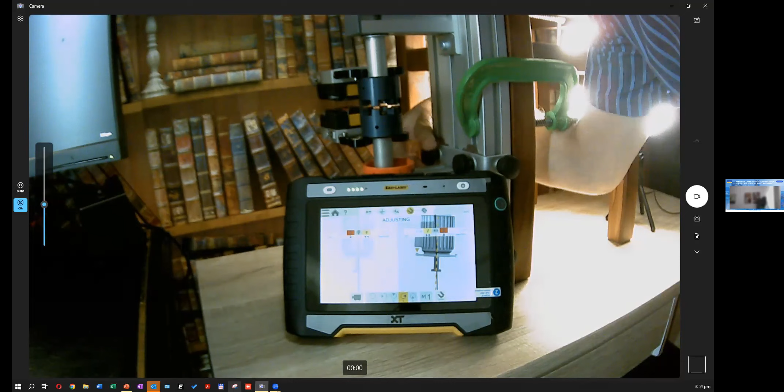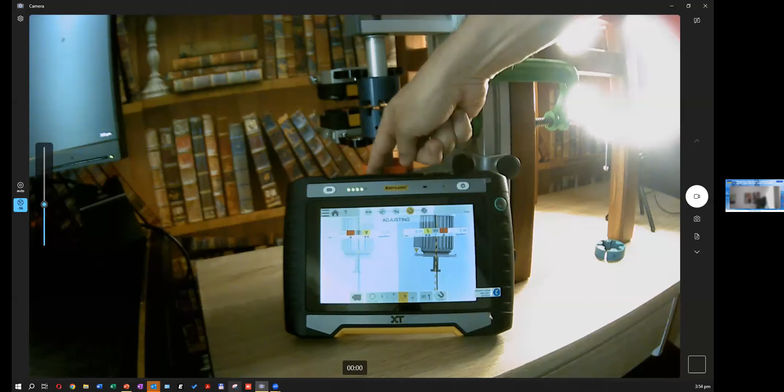I try to simulate this quickly, to bring my machine into a certain range, I'll try to bend it a little bit. Then you can see live on the data that the color is changing. Depending on where I'm putting shims, I would do the correction itself. This is the way you'd proceed in correcting the vertical alignment of the machine on those two axes, purely by shimming on the feet until everything is green.

Then you finish the reading and stream it potentially into the cloud. The instrument has a feature activated in the background so that when there's an internet connection, all of the data goes right away into the cloud. That's also free for the customer right now — it's called Easy-Laser PLUS. I have an account in this cloud where all the data from the instrument I'm using goes.

I have here an organization inside of the setup. There I have a workspace. In this workspace, I'm getting all kinds of pictures that I have in the storage of my measurement unit. And I also have my reports.

This is a report that I did yesterday. I haven't finished a report on the instrument right now, but in the same way, the whole report would be transferred into the cloud. You can invite your customers, share it, print it, send it via email from here. You can do that as well with the instrument itself. Okay, sorry that I've taken so much time.

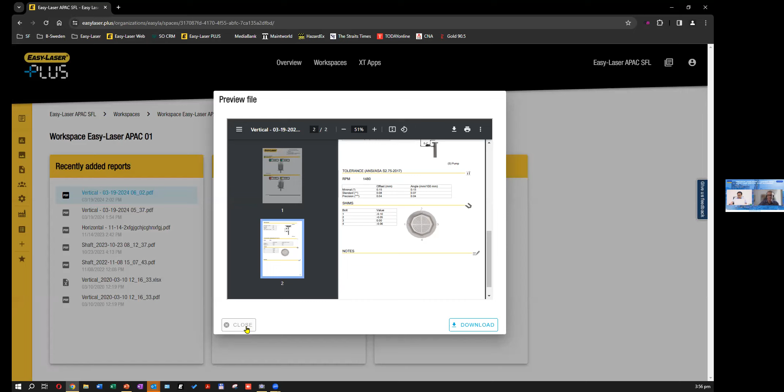Yes, okay, I'll start with the first question, from Pak Edo Widi. Based on your data and your experience, how long should we conduct an alignment check for each vertical shaft unit? 1 year, 6 months? How long — what kind of cycle?

It depends on the operating hours. If you have very new equipment, you can schedule that based on time, but I would advise against it — I would really do that based on operating hours. So that starts with new equipment where you have a proper alignment at the beginning, and evidence suggests about 1.5 years, so 18 months.

Then you check again, meaning in a 12-month cycle. If you find any deterioration in that 12-month cycle, then of course the next cycle should come a little earlier.

I have one slide I have not shown in this presentation, but I can share it with you, Mr. Rojecki, so you can share it with the audience later. It explains the operating hours for newly commissioned machines or already in-place operating machines, based on time interval and on operating hours. I think it's better to provide you this overview. That is a recommendation from us.

Thank you, Sven. So it's 18 months, yeah? For newly commissioned equipment, under the assumption that this is also checked at the very beginning to be perfectly aligned. Okay, thank you, and we will also share the paper with the customers.

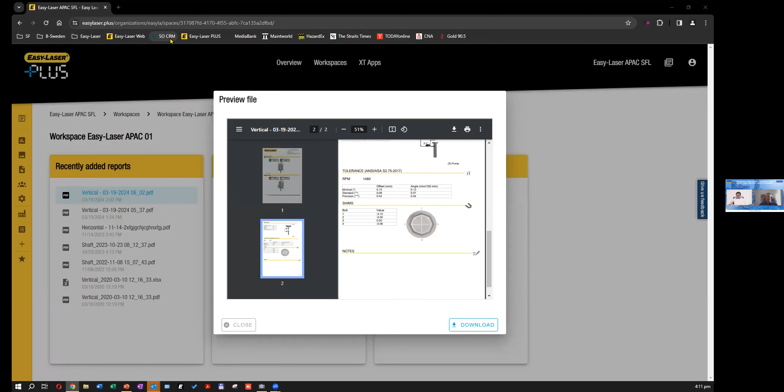Fixed cover with the shaft, vertical shaft. In this case, there's a shaft that only has fixed cover with a distance of 5 centimeters in our measurement units. The unit itself has a diagonal axis dimension of about 6 to 7 centimeters.

They have this kind of cube shape and are connected with brackets, even the smallest bracket or magnet, for example, to mount those measurement units on the shaft. Consequently, we need a kind of space around the shaft to rotate - I'd estimate quickly, 10 centimeters plus.

If this space isn't given because you need to mount the transducer somehow, then you just cannot measure that. But I would need to see a real picture of the machine or a drawing, because in most cases we find ways to extend with certain brackets - either a Z bracket to extend it into the axial direction, or extend the position of the measurement unit through other brackets and posts further away outside of the space limitations so you can still rotate it.

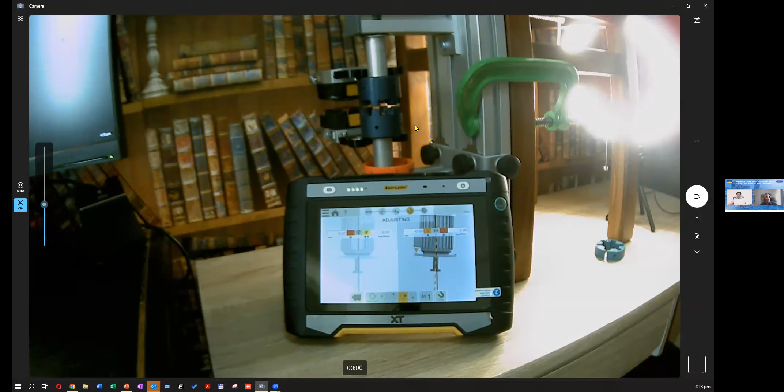The accuracy doesn't really change, but when you use a laser in intense radiated sunlight, it could mean the detector is no longer able to differentiate between the laser beam we use to emit compared to sunlight and other radiation. That can happen when you're facing the detector toward sunlight, and when there's a huge distance between the laser beam and the detector.

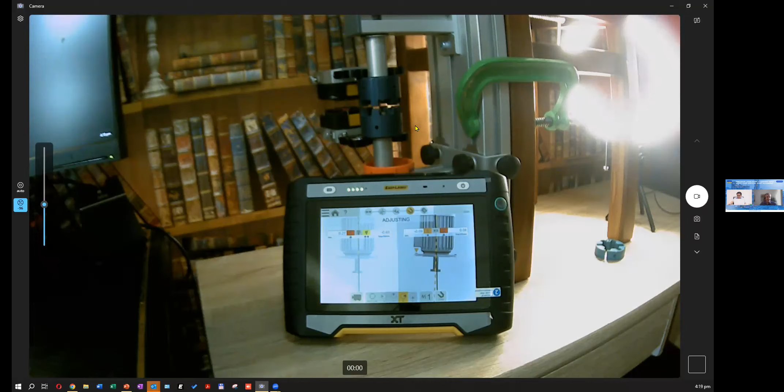By specification we can measure up to a distance of 20 meters. At 20 meters, the laser beam is strong enough to differentiate on the detector with 1 micron. But over that distance, the laser beam loses some energy potentially. And if that happens over a long distance in sunlight, since a laser beam is nothing different than light, the detector may no longer be able to differentiate it.

That's quite common with instruments using a line laser. The one I'm showing today is a dot laser, meaning we can centralize the energy in a slim beam, a dot. These typically cope with that issue a lot better compared to a line laser, where the same energy is shared over a wide range. So typically, a chance to avoid that kind of issue is to shade with a piece of carton or something to protect the detector itself from radiated light.

If you have these problems, and I know a few cases with a line laser of other products over long distances in open sunlight where this happened, they found a solution just by putting a kind of shadow and shade over the position of the receiving part, so the line laser is not so much influenced on the detector when it's hit by sunlight.

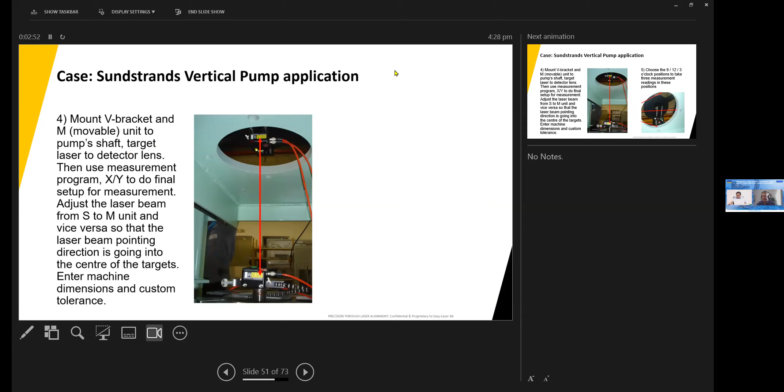Is it possible for us to do the laser alignment with the boiler feed pump? Because the set point of the boiler feed pump is not zero. For example, the vertical side of the motor has a set point of 0.25 millimeter from the pump, and also in the horizontal side, the pump also has a set point of 0.2 from the motor. So can we do the laser alignment with this condition of the boiler feed pump?

Yeah, so this is basically a compensation factor, likely because of thermal growth. That means those two data, that either the manufacturer can give us, which often are not 100% correct, can be verified and also measured, identified. You just key them in at the initial setting from the shaft alignment.

So at the position where you define coupling, motor, machine, your tolerances, you can also key in the compensation factors, like your zero point. That means the machine, for the cold condition alignment, would be aligned including that compensation factor. That means actually not perfectly aligned, but when the machine goes into operating state, this compensation is already there, and the machine works against the compensation, putting it into the theoretical perfect place, where the center line of the shafts will then be aligned according to the requirements.

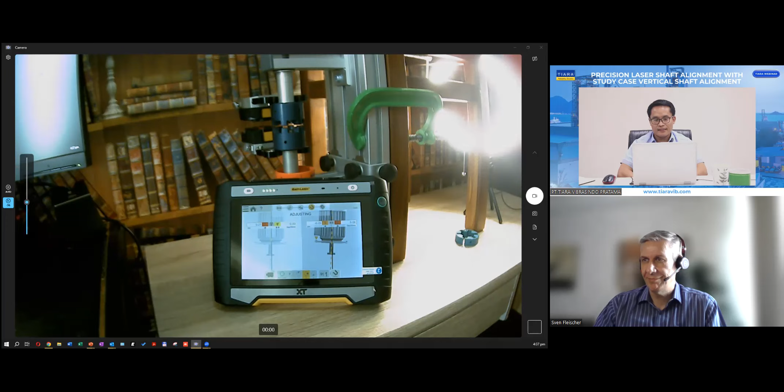Sven, could you please stop sharing your screen from your side? Thank you. So Sven, we have to give a giveaway to customers who asked questions. You make a lucky spin. That's right, lucky draw.